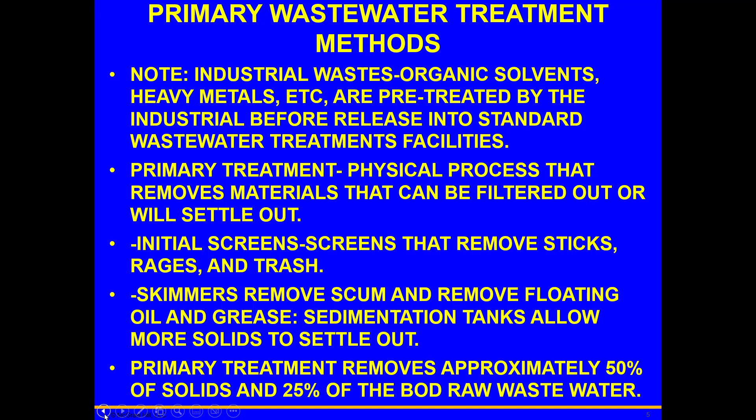The primary treatment will remove approximately 50% of the solids and 25% of the BOD of raw wastewater. Now, if you go to the next level, which we'll get into in a minute, you'll find that we can remove even more of the BOD material.

Once the primary step is completed, the bottom of the tank is going to be scraped. Basically, you remove the primary sludge. This is sent to a secondary anaerobic sludge digester. Keep in mind, aerobic is with oxygen, anaerobic, AN, says without it. So we have different microorganisms that play a role in this.

Now, in the secondary treatment, you have biological processes that convert the suspended solids into inorganic compounds and a cell mass. As much as you want those particles to settle down to the bottom, some of them are going to be almost like colloids. They're going to be present in the liquid no matter what.

So you're going to basically go through a second level of processing. This will eliminate 95% of the BOD.

Aerobic organisms are going to basically convert a lot of the biologically degradable organic material to carbon dioxide and water. It's basically providing them with the necessary nutrients so that the bacteria will remove a lot of the organic floating material that's still suspended, and use it as fuel while converting it to CO2 and water.

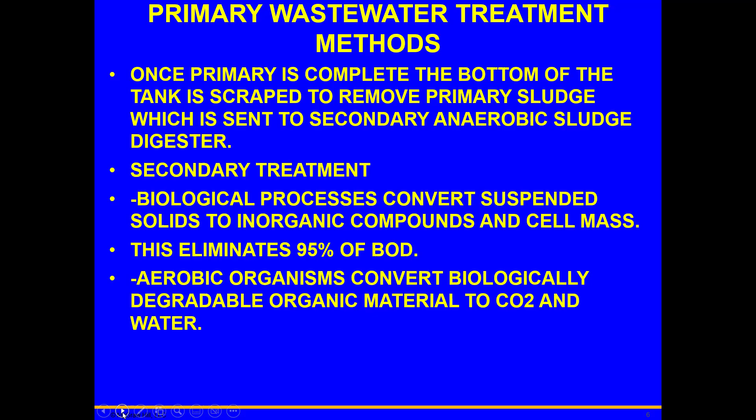What you see here is a process. First you have the screens, then you have this primary treatment. Now the sludge from the primary treatment is going to be sent over to an anaerobic digester. We'll get more into that in a minute.

We may pump air into it, and it's going to be an aeration tank. And then we have further sedimentation, and then we basically go through the sludge digestion.

We may use instead a trickling filter system. That's where you might see some of these round tanks, and they've got sort of a sprinkler system around it, and it may have some rocks or pebbles. Don't be dismayed about the rocks and pebbles, it's the biofilm on them that's going to break down and clean up the water to a degree, and at the same time remove some of the floating material. The rocks provide a firm foundation for the biofilm.

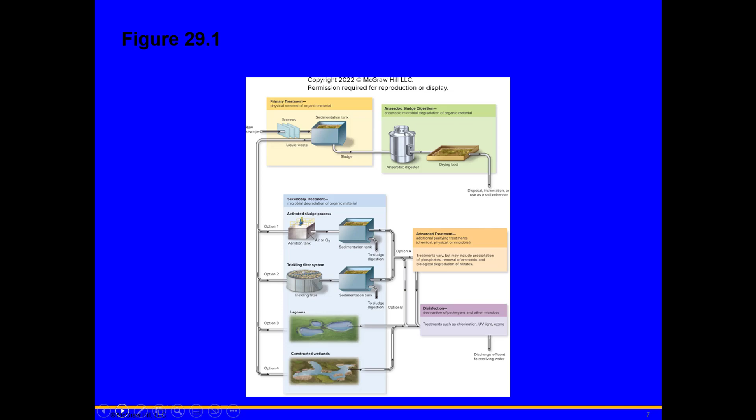As you can see in my notes, we have the activated sludge process, using mixed populations of aerobic bacteria. They grow as flocs - in other words, suspended biofilms, lumps you could say - moving around. And they add O2, that's where you get this aerator, basically added to the mix. It creates biomass and waste products of CO2.

One of the other formats is a trickling filter system, frequently used in smaller systems. As I mentioned before, that's a rotating arm - it distributes the wastewater over the biofilm of mixed organisms which aerobically degrade the organic matter.

One of the other places you'll see is lagoons. You take the wastewater and channel it to these man-made shallow ponds or lagoons, and they're degraded aerobically by algae and cyanobacteria. Cyanobacteria, if you're not familiar with it, are another type of bacteria that actually use sunlight, and they will produce oxygen.

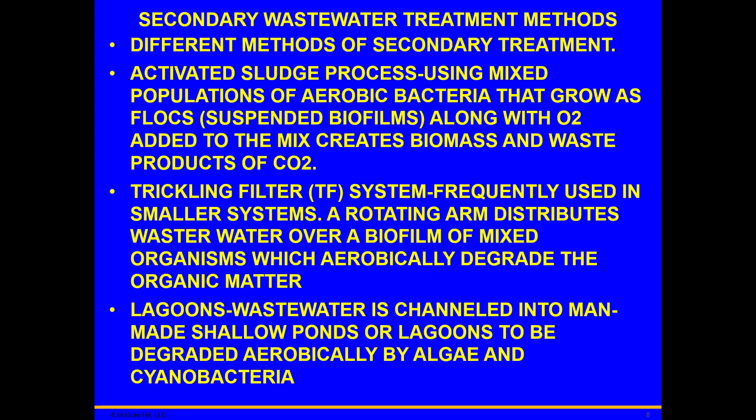So here is the rotating arm process. Basically, the liquid waste from the primary treatment center comes up here, and then you have this rotating arm that basically sprays down all the pebbles - they may be plastic pieces or coarse gravel and rocks. These are covered with a biofilm of microorganisms, and it will break down things as the water trickles through.

And then you eventually have liquid waste from the filter go to a sedimentation tank. So this is an outlet pipe, and it may require still further advanced treatment or disinfection.

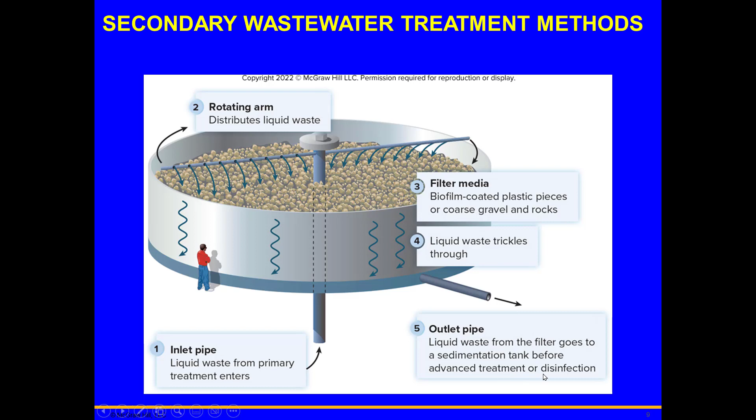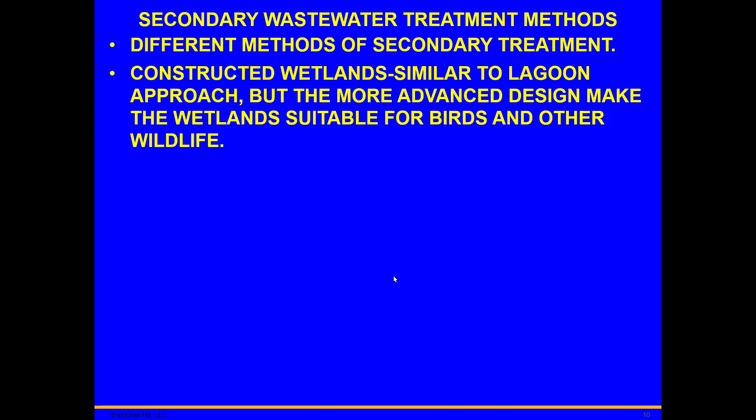Finally, of course, I mentioned the constructed wetlands. Again, it's a similar approach to the lagoon, but you know what? They found that by doing this, they get such a biodiversity of life that it becomes a suitable wetland for birds and other wildlife, as you can see here. Now, they may have artificially started it...

But now you see how this water is literally getting cleaned up, not merely by the microorganisms, but by the presence of a variety of other organisms, plants, algae, etc. And it really does work wonders. The only challenge is that it takes a lot of land in some cases - you have X amount of land for your treatment plant, but then you're going to need a Y amount of land to set up this wetland right next to it.

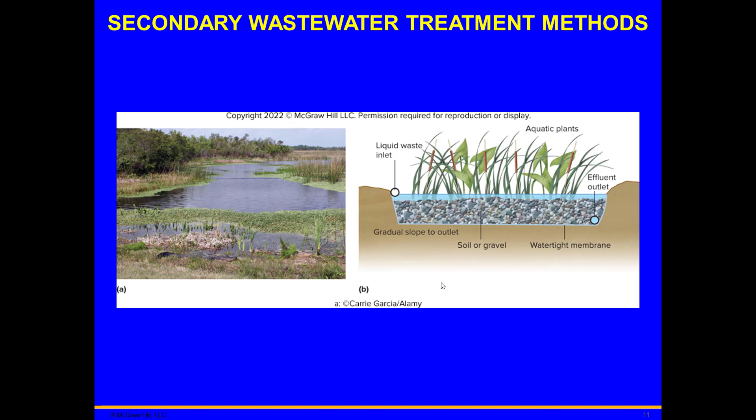Advanced treatments involve a variety of physical, chemical, or biological processes, with a big emphasis on removing excess phosphate, nitrates, and ammonia. Some bacteria take ammonia and turn it into nitrogen gas, which is good. Some incorporate phosphate, and others convert nitrates into nitrites, etc.

You don't want too much nutrient-rich media getting into wastewater, wetlands, or rivers, because it creates unusual algae blooms and becomes a very hostile environment for certain organisms.

If you suspect there are still pathogens around, prior to discharge into the receiving water you may add a disinfection step, usually chlorine, ultraviolet light, or ozone. Because chlorine can be so devastating and you don't want it to build up, they usually chlorinate to kill organisms, then add a dechlorination step to remove a lot of the chlorine.

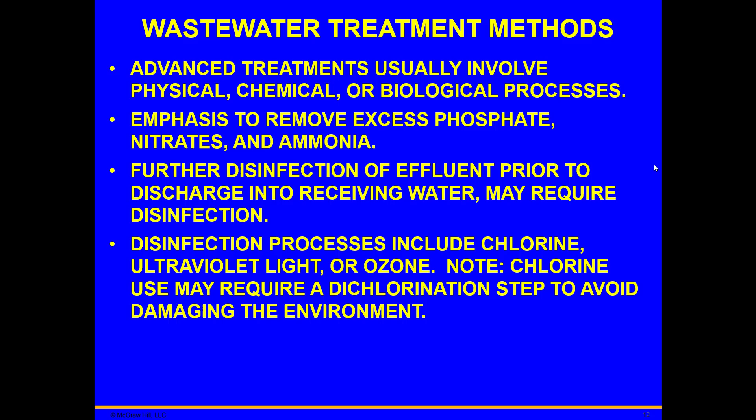Now what do we do with the sludge? It's interesting because back in the 60s people would have turned their noses up at this, but now the sludge is removed from both the primary and secondary steps and transferred to an anaerobic digester.

This anaerobic digestion produces methane gas, which can be harvested for biogas. In two-thirds of the world, they actually do this—in some cases it's part of their home, providing gas for heating, lighting, etc. Some other places unfortunately just allow it to be released.

After that, the biosolids—now considered stabilized solids, so they're called that too—can be used as fertilizer for lawns, farms, etc. Some farmers plow it right in; it doesn't smell too much, and it enhances soil fertility, giving bigger crop yields. There are no diseases believed to be associated with this.

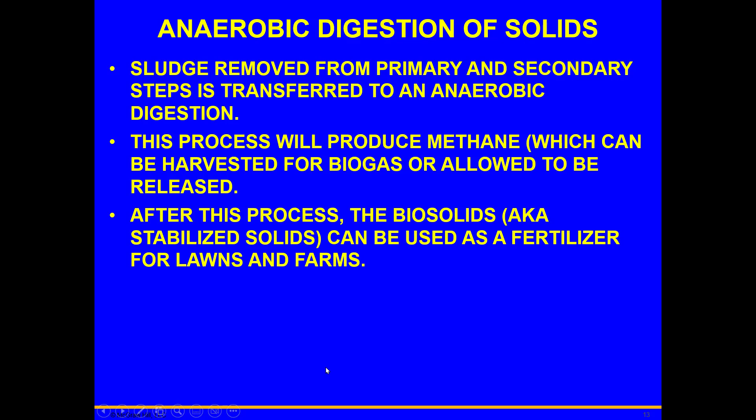Now what about rural homes? We've been talking about wastewater treatment systems for areas with higher population density, either city or suburb. In rural homes, they rely on septic systems for wastewater. Wastewater solids settle into a large tank and are anaerobically digested, and the solids are removed periodically.

Having lived in Western Massachusetts, I had a septic system. What happens is you call a gentleman, he comes up and removes the cement cap, usually covered with about 6 inches of soil, and pumps it all out, bringing it to the local sewage treatment plant. You do that every couple of years and everything is fine.

In Massachusetts, the laws regarding this are called Title V. You can't sell a house without a Title V inspection, which confirms the system is still working fine. That's because we don't want wastewater migrating into groundwater or other systems.

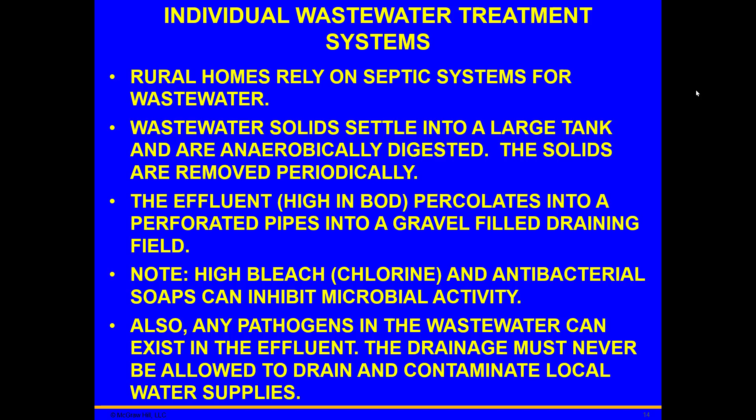So you have that potential. Therefore, where you have the drainage, you never allow it to drain or contaminate local water supplies. So you have an engineer set up where the septic drainage system is, but it's not near any wetlands, nature wetlands, or near any groundwater like pumps, people that have wells and things like that. Because you don't want to have that happening where it can then possibly contaminate or make someone very, very ill.

And as you can see here, here's an example of this. You have the household wastewater coming in there. Now, some places I've seen, I actually have seen this in Florida, is they have two separate septic tanks. One handles what they call the brown water, meaning that it contains just human fecal matter, waste like that. Then they have another one that handles the gray water, which is more like laundry and other things. But the key point is that the septic tank will grab onto the solids, hold on to it here, have maybe some scum here. This is the wastewater coming in. And then the liquid drains out to another field. In the meantime, all of the solids, or a lot of them, get passed down and descend into here's sludge.

Basically, you have also, this is usually a much larger box. Some of them nowadays require 1,200 to 1,275 gallons. So you got a big, deep box. And the drainage goes out to this field. This is all wrapped with gravel around it. And basically what you have in some cases is a vent pipe. And you can tell the vent pipes, if you ever see them, kind of strange. They look like a candy cane, but it's made of PVC pipe, and it's not red. It's just a white pipe that comes out of the ground, and it's just a drain pipe and allows for any methane or something that just gets vented out. All right? Okay.

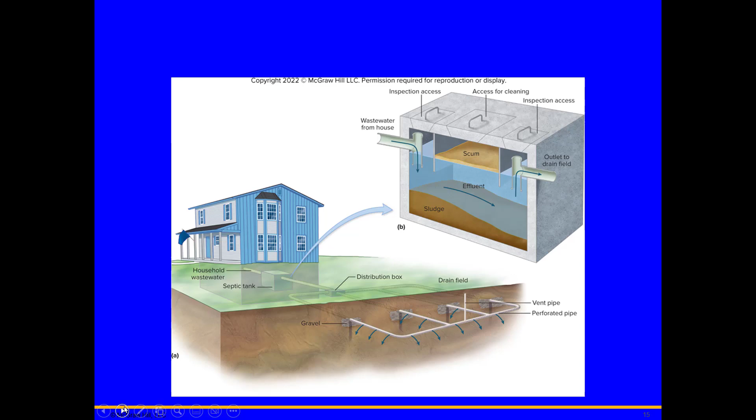Now, we're going to move into drinking water treatment and testing. Large cities can obtain drinking water from lakes, rivers, etc. The problem is that in some cases, water treatment has not always been very good. Flint, Michigan is one sad disaster where it turned out that there was a lot of contaminants, particularly lead, that was in the water. And what had happened was the drinking water processing plant had shut down, and they went straight to regular river water, and a lot of people got sick.

Now, usually what we have is we have to deal with any type of natural source, whether it's reservoir, whether it's river or lakes. We got to be aware that contamination can occur. Usually it's from animal feces or industrial effluent or fertilizer runoff. Some communities or individual homes access groundwater for drinking. So in other words, groundwater, they have a well.

But the Safe Drinking Water Act of 1976, now this was later amended in '86 and in '96, basically sets limits on drinking water contaminants. It empowers the Environmental Protection Agency to see and monitor these situations. And it also basically sets maximum levels for viruses, Giardia cysts, and cryptosporidium oocysts. Okay?

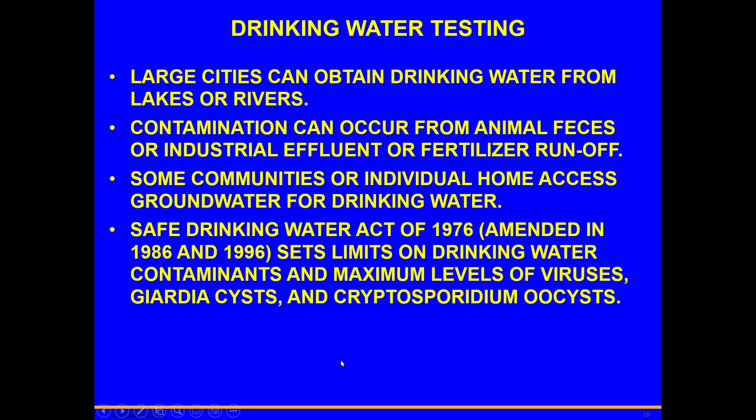Now, community drinking water provides safe water. We usually use the term potable water. If you've ever seen that on vehicles or trucks, and they're carrying potable water that's basically safe to drink. And they transport from a reservoir to an initial settling tank. Now, I can tell you from where we lived, we had one of the largest reservoirs in New England, not too far away from us. And there were also smaller reservoirs in different parts of Western Mass. And they monitored things. If there was any chance that something could get in there, or if there was heavy rains and there was lots of animals that had been doing pooping, they would get some of these microorganisms into the water. But we'll get into some of the testing later.

When the water comes into the initial settling tank, they add some type of coagulation material. This material may be alum or other types of things, but it forms clumps. These are referred to as floc, and they will then settle out.

They may continue further steps to include sedimentation and filtering. But because this is going to be consumed as drinking water, they may include final steps including disinfection as well as storage.

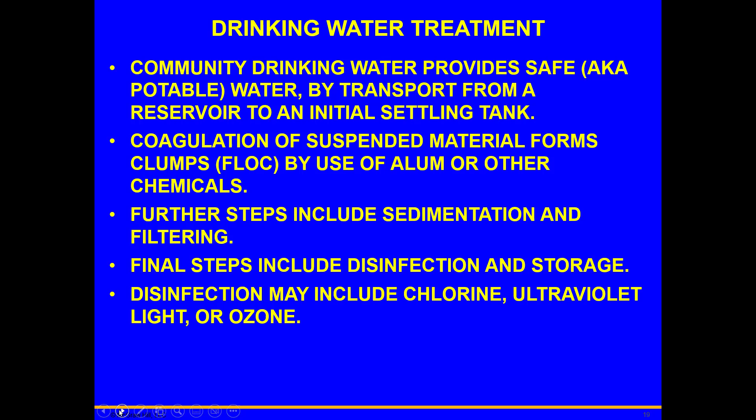One of the problems you have with chlorine is that if you have enough organic matter still in there, the chlorine loses its effectiveness. You have to add greater amounts.

Here we have the situation of large matter material settling in. This is for a water system for a municipality. You add the coagulant here, so it could be alum or other types of chemicals, and so you have this floc form. These are like floating particles that get bigger and bigger and eventually settle out.

Then you have the sedimentation tank, and then the water is sent through. And in this place here, the filtration, that's where you're going to have microorganisms, protozoal cysts, oocysts, etc. That's the filtration. You may finally add activated charcoal filters to remove any dissolved chemicals as well.

The surface area of activated charcoal is incredible, and it's useful in decontamination or breaking down of certain chemicals. Finally, when we've had our reservoir and stored our water, before we have it for consumer use, usually you treat it with either UV radiation, chlorine, ozone, or a combination.

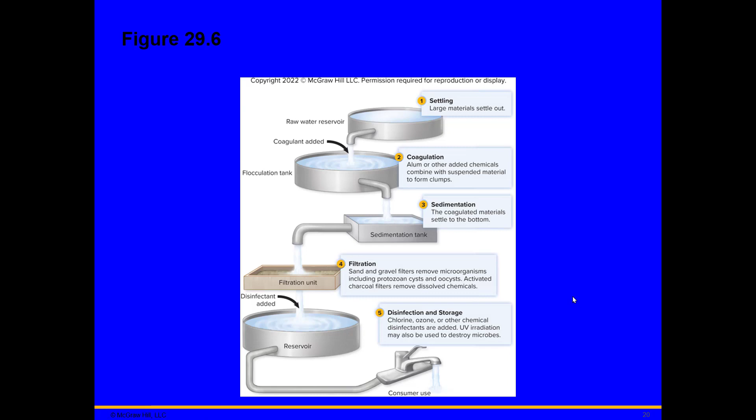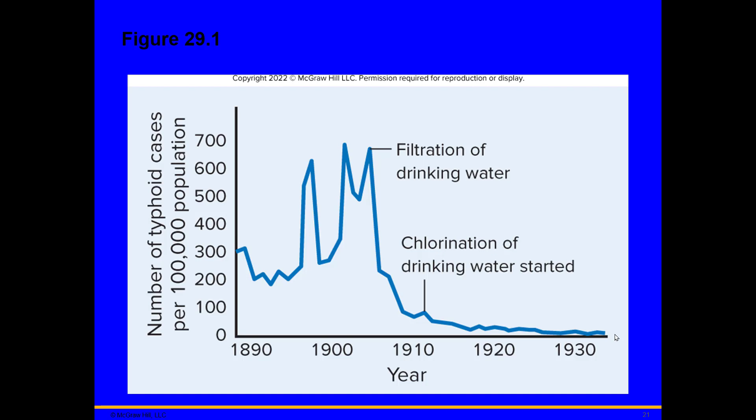Now, how are we sure that the process does what it's supposed to do? Well, there's drinking water testing. This is absolutely critical if you want to determine if the water is contaminated with intestinal pathogens or not.

Now, the problem is you might have to use some indicator organisms, as if to say, look, I'm not testing for 15 different or 60 different types of organisms. I'm going to sit there and say the most common organisms that might be around will probably tell us that there are some possible pathogens present. That's the major concept. We use surrogate organisms that would be normally found in feces.

You might have heard when they do these coliform tests, people can't go into ponds or swim lakes because they say the coliform numbers are too high. That's because in that water there may be bacteria that came from fecal deposits from, you name it, birds, nearby cows, etc. So the total coliforms, this is the most common form of testing.

What you do is you're really testing for lactose fermenting Enterobacteriaceae, and then of course it includes E. coli.

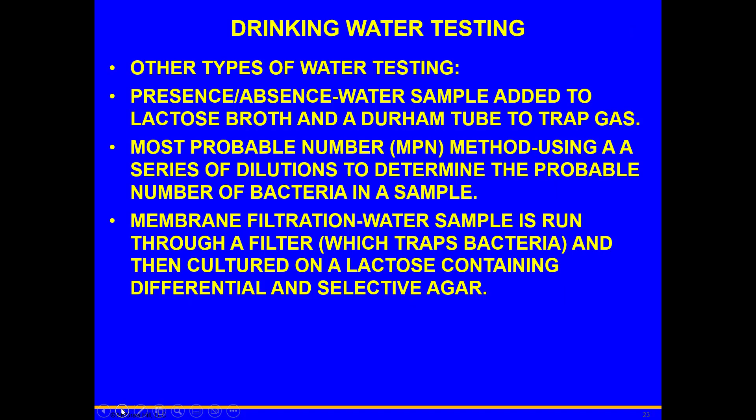You can see this is one of the tests that they had. If you go back here, we had a type of test that basically looked at a chemical test where you had the ONPG and the MUG. In those tests, you could determine the presence based on E. coli and based on some of these other organisms being present.

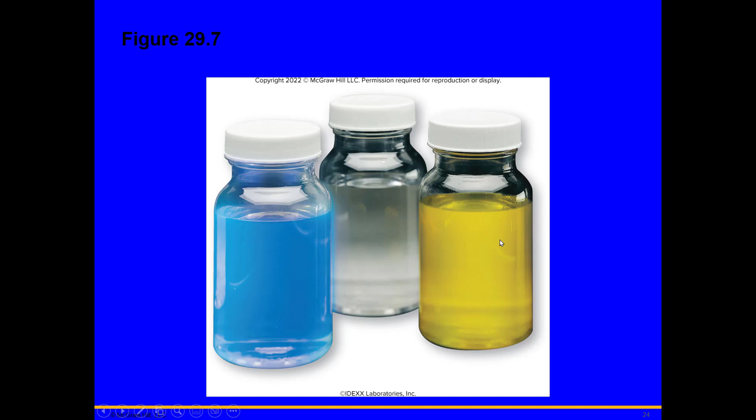Okay, so we've been talking about effluent and pure water and things like that. So what do we talk about here with solid waste treatment?

Now, I'm not going to get into the massive amount of trash, like tossed away beer cans and old furniture and all that stuff. Let's just talk about some of the non-hazardous biosolid wastes. So when I say we have a sanitary landfill, this is a site that's used to dispose of non-hazardous solid waste. But there's criteria for placing some of these landfills.

They have to be away from an earthquake site. They have to be away from wetlands. They have to be away from floodplains, etc. Now, usually what you do is you have the site with a clay bottom, as well as a clay cap on top. But before you put the bottom and start putting material in, you add plastic sheeting. This is to prevent seepage of the contaminants.

Once you've got that cap of sand also placed on top, you're also going to have those little tubes sticking out, allowing methane, which would normally be produced by the microbiology still present in the solids, and you're going to either collect that methane that's being generated or vent it out.

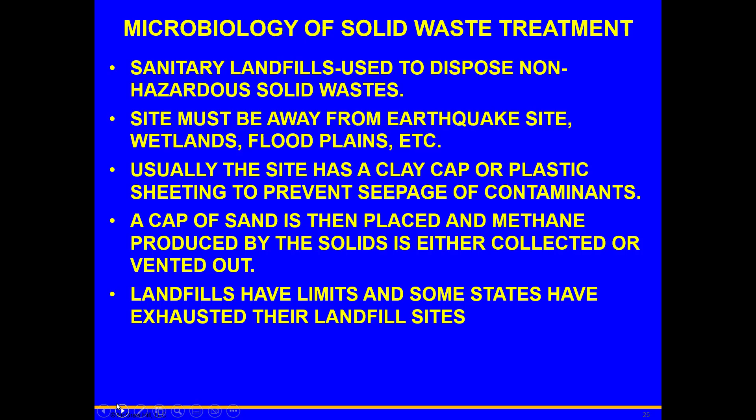And there are some communities, in Chicopee, Massachusetts, or in Hartford, Connecticut, where they're taking in the waste from a bunch of different nearby communities, because those communities' landfills are filled. And it's only a matter of time before they get to the point where they have no more place to put the stuff. That's one of the challenges that exists right now.

Now, there is something to be said for some other alternative means. If we're not talking about industrial waste, if we're talking about solid waste like plant matter, garbage - let's say you had a plant that was processing lobster and crab, so they have a lot of those shells, etc. Or they're processing fruit, and so they have the fruit rinds and everything else.

There are some ways to compost that material. Let decomposition from the microbes, both fungi and bacteria, break it down and then use it for some other purpose. So composting is a process to convert solid waste, using a controlled decomposition via microbes, to improve the soil fertility and soil structure.

Because what happens is, as long as this is clean compost, meaning it doesn't have industrial material or pathogens - and a lot of places now do this - some communities have a composting site near the physical plant, or whatever they call it, community physical plant. They'll take the Christmas trees, grind those up. They'll take all the leaves, grind those up. And basically they'll have these huge mountains of compost. The only thing you really need is oxygen.

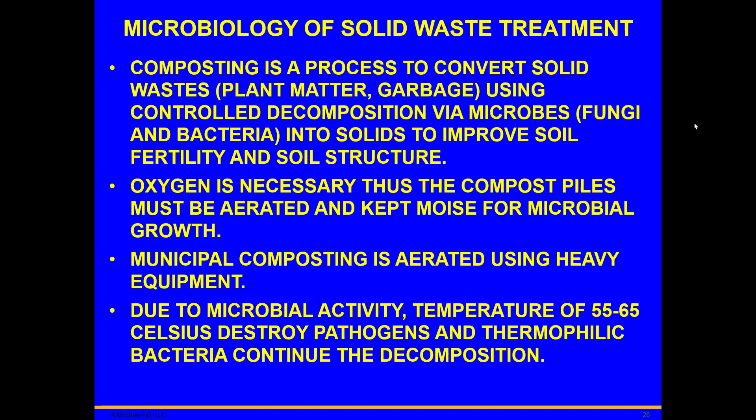Here's the trick though: during microbial activity, you get a temperature of 55 to 65 degrees Celsius, somewhere between 140 and 160 Fahrenheit. First, that destroys pathogens. Second, you have thermophilic bacteria that help continue generating heat and continue the decomposition. What's left is basically a solid breakdown matter that you can use for fertilizer or to build up soils.

Some communities collect all the Christmas trees after Christmas, all the leaves and fallen branches and stuff like that. They basically grind it all up and throw it together, and within a short period of time you've got a large amount of compost that can be used for farms, gardens, enhancement of soil, etc.

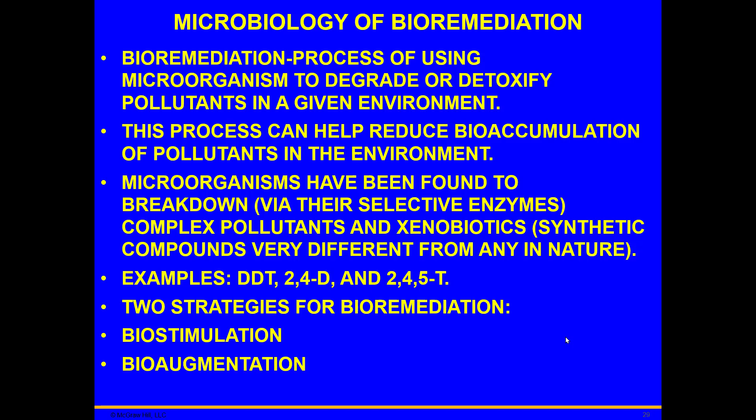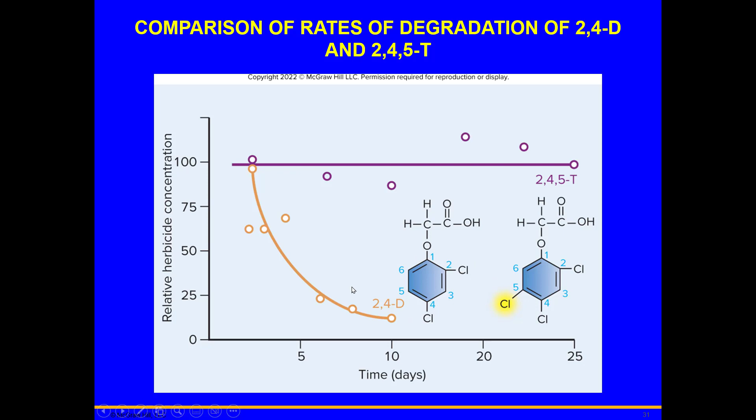Here is a comparison of the degradation rates of 2,4-D and 2,4,5-T, which are basically herbicides. Over a period of days, the 2,4-D within 10 days is now about 12.5%, so its half-life is somewhere around 3-4 days, and the next half-life is about 6 days. The 2,4,5-T is tougher to break down because it has that added chlorine. As a result, you have to find more unique organisms that are able to break it down, as well as find ways to cultivate those organisms.

So let's get back to the two strategies of bioremediation. Biostimulation is the process to increase the effectiveness of oil degradation by naturally occurring organisms. The book focuses on oil degradation, but there are other applications too. You might remember the disaster where there was an oil spill due to a blowout of an oil rig in the Gulf. What they did was spray nitrates and phosphates in a solution to enhance bacterial degradation of that oil spill. There are various microbes that can naturally break down oil, and if you give them the right conditions for growth and sustainment, they will reproduce and break down even more of the oil.

Bioaugmentation is a little bit different—similar, but different. It's a process that involves adding other microbes to contaminated areas. You can add bacteria that help break down components the original bacteria started on. You can also include fungi, which will help accelerate the degradation process.